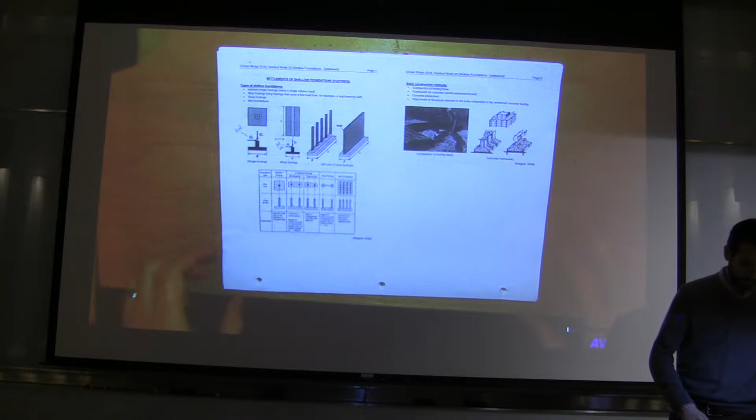Because I didn't know how to say it in English. Thank you. It was, all right.

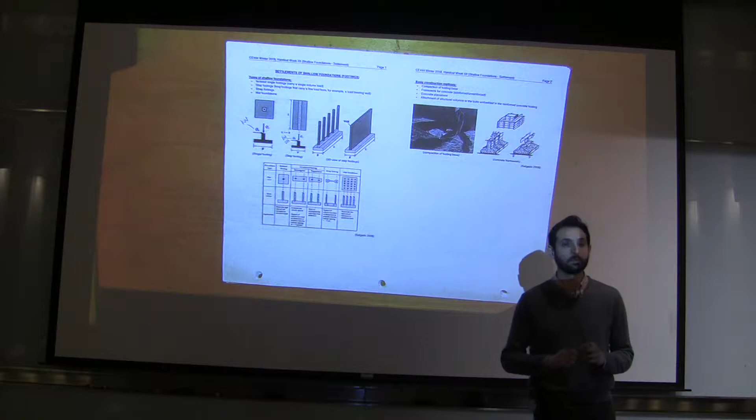Just a general question from the homework: are we going to... there's a portion of it that seems like review material, and the second question where you're breaking it up into sub-layers to calculate the effective stress and consolidation of those layers. Are we going to be reviewing that as a class, or is that something we need to review on our own? I expect that you reviewed that on your own.

That part is related to the consolidation class in soil mechanics, and I'll get to that in today's class, and I'll show you the part that I want you to review. You can use the homework assignment I uploaded on D2L under soil mechanics notes as a guide to help you go through that part of homework 3. But I rely on you to review that part.

From last class, I was getting a little confused. For flexible footing, is it when the stiffness of the footing is less than the stiffness of the soil? That's a good question, there isn't a really good answer to that of what less is. It's not when the stiffness is less than the soil stiffness.

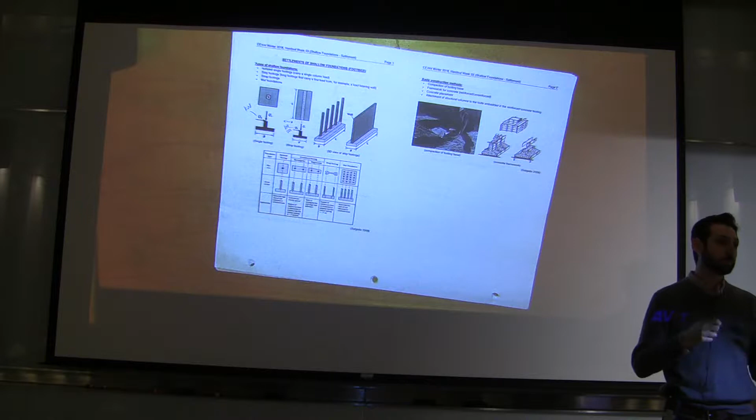The stiffness of the footing, the foundation, whatever material it is, whether concrete, steel, or wood—foundations are usually concrete, but in some cases might be made from other material. Whatever it is, it's going to have a higher stiffness compared to the soil. The question is how high that stiffness is compared to the soil. If it's really high, then it acts as a rigid foundation, but if it's somewhere closer to the stiffness of the soil or rock, then it's considered flexible.

For example, if you're building a foundation on sands and clays which are relatively softer, that concrete foundation will act as a rigid foundation. But if you're building the same concrete foundation on top of rock, which we do a lot when we build bridge foundations—we want to get down to the bedrock, not put the foundation on the soil, but dig and excavate enough to get to the bedrock.

In those cases, the stiffness of concrete compared to the stiffness of rock are pretty comparable, and in that case the foundation acts as a flexible foundation. So it's really a relative ratio of these stiffnesses.

And there's no set number, we can't really say—relative is kind of vague. There's no distinct line you can put there where this is everything above. I think there are some numbers based on older closed form solutions.

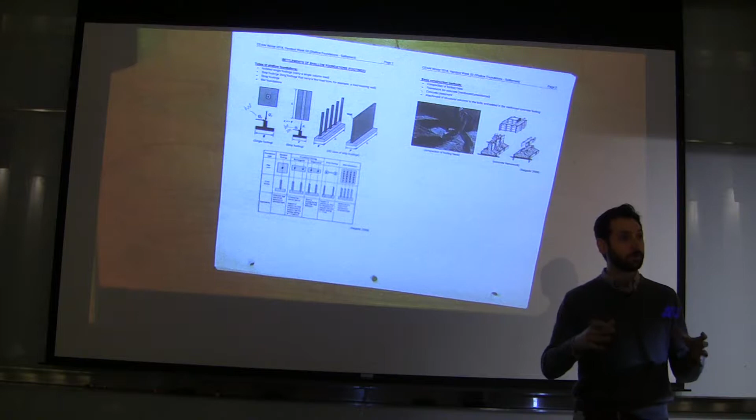So just one example for that, and we do that quite often: I was working on a bridge project in Canada where we had to design the foundation. There were two types of foundations: deep foundations, piles that were going to be drilled into rock, and then footings, giant 4 by 5 meter with almost half a meter to 1 meter thickness footings sitting on bedrock.

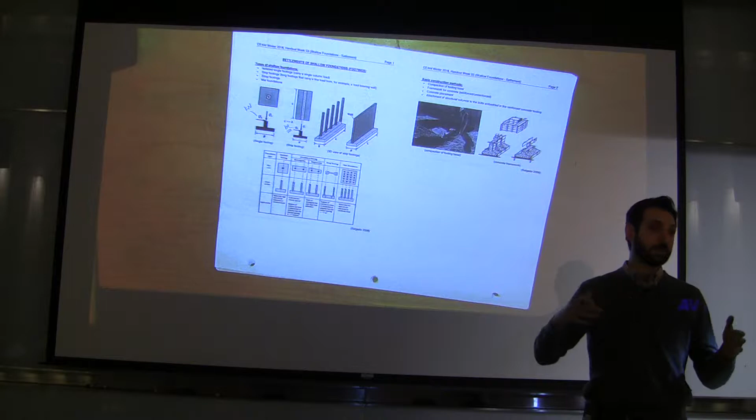We originally started assuming rigid foundations, and then the client, the structural engineers, came back and said, well, you're making this assumption, it's conservative, but in the seismic studies, it may not necessarily be conservative. And you can easily switch back and do the calculation based on flexible foundation.

In our case, it turned out that for a 4 by 5 meter with 1 meter thickness concrete footing sitting on the type of rock that we had on the eastern side of Canada, which rock tends to get a lot stiffer as you go towards the east versus the west, that foundation turned out to be flexible because the rock was so stiff.

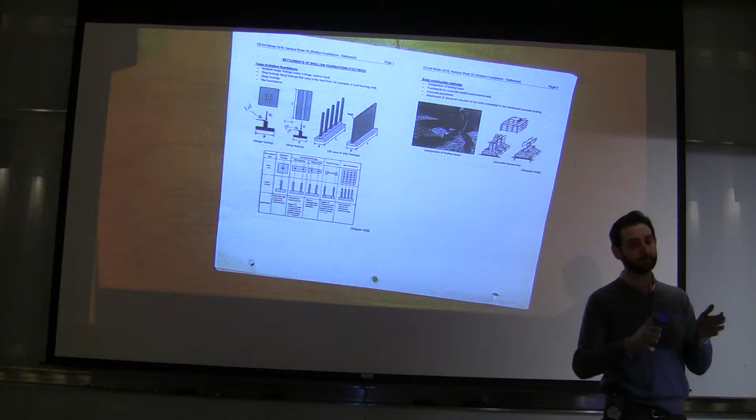So to give you a short answer, there are limits, but I don't have it off the top of my head, and we tend to not really use them these days.

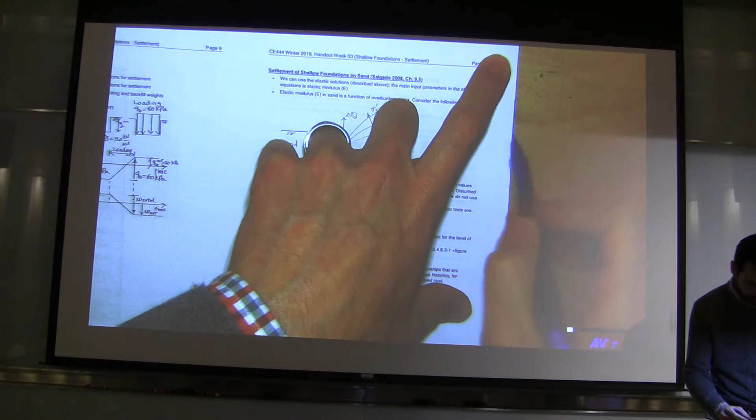All right, so page 10, settlement of shallow foundations on sands. I'm just going to quickly go over the remaining pages to give you an idea of the outline of the class. So we have the settlements on foundations on sand, and that goes through pages 11, 12, 13, 14.

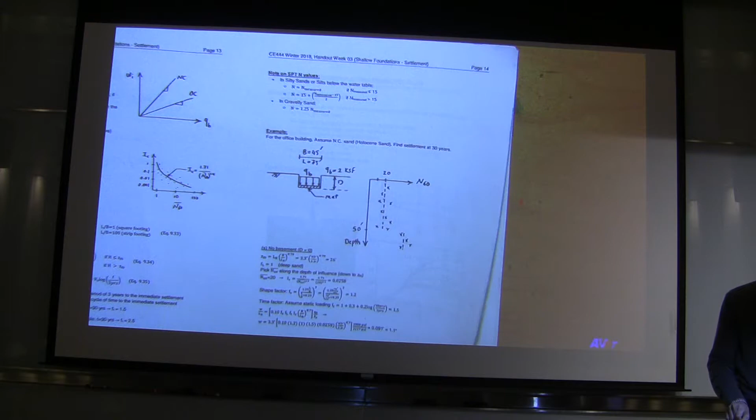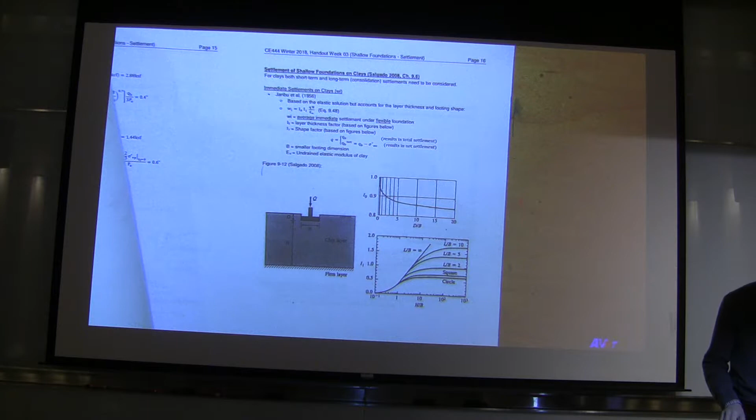And then on page 16, we get the settlement of shallow foundations on clay. The settlements in clays are divided into 2 sections, the immediate settlements and the consolidation settlements. The material on pages 16, 17, 18, and 19 are for the immediate settlement of foundations on clay.

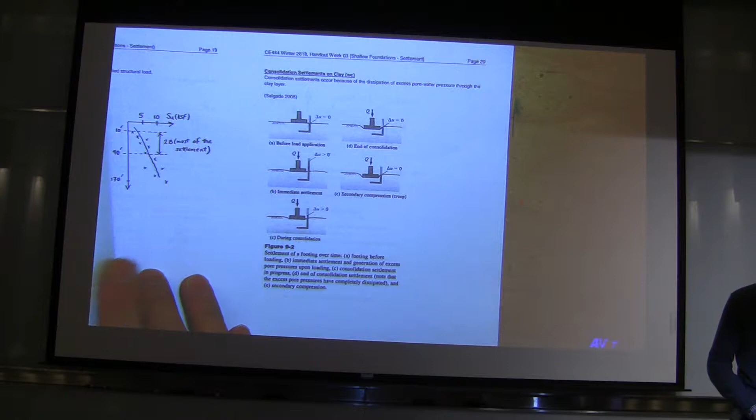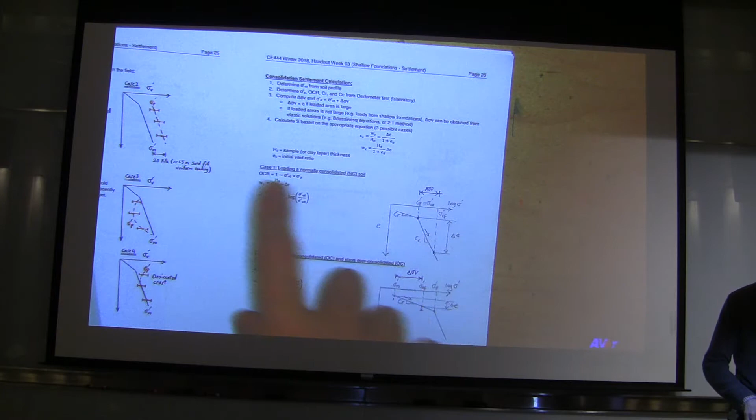And then starting page 20 is the part that I want you to review on your own, which is the consolidation settlement. That goes through pages 20, 21, 22, 23, 24, 25, 26. So if you remember on 26, we had all these case 1, case 2, and then on page 27, we have case 3 in our soil mechanics class.

These are basically reviewed, so I'll ask you to review this on your own.

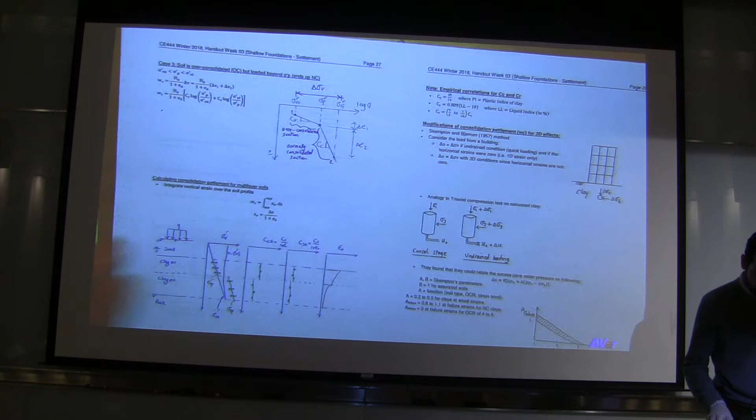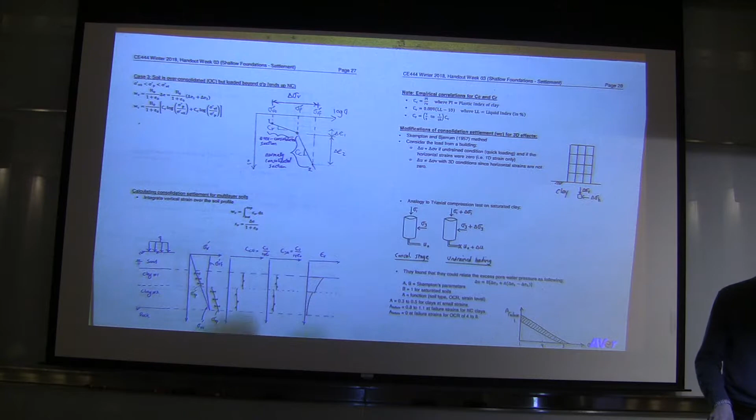On page 28, there is a section I'll start covering in this class, the modifications we have to do for 3-dimensional settlements. The stuff we discussed in soil mechanics are all 1-dimensional settlements. Now we want to see what happens underneath a building where we get a 3-dimensional settlement and dissipation of the pore water pressure, and how that affects the amount of settlement. So there's a little piece on pages 28 and 29 on 3-dimensional settlement that I'll cover as part of this course.

So let's go back to page 10. It's on the settlement of foundations on sand.

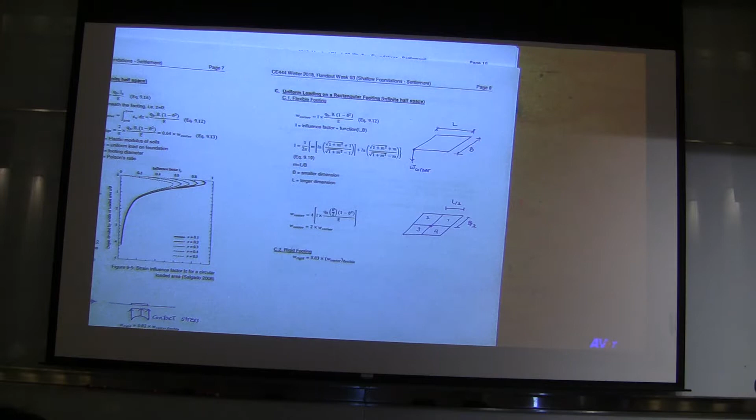Now I want you to, for a second, go back to the equation that we had for elastic solution. Maybe flip back through your notes and let me know if you can spot the general equation for elastic solutions. Let me know the page number. Oh, here it is, page 6.

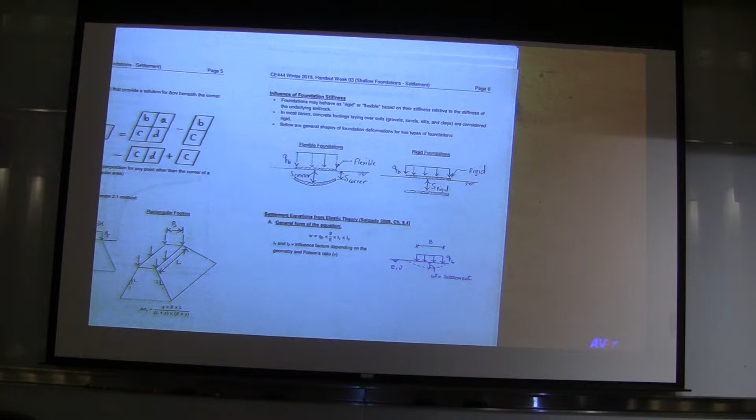General form of equation based on elastic solution. So when we say elastic solution, it means that we don't care about sand or clay or any other material. It could be steel, concrete, anything. That's how the form of equation is developed. I want you to look at the components in this equation.

So the settlement is a function of QB, that's our load. If you increase the load, the settlement increases, that's obvious. Then we have B, the dimension of the footing, in the numerator. That's a little counterintuitive, because you'd think that if I'm increasing the dimension of the footing, why would my settlement increase? Well, the reason is that if you increase the dimension of the footing and keep QB, the stress, the same, your total load will increase with the square of the dimension. So you're increasing the dimension, but your total load is increasing more than your dimension is increasing, and that results in the increase in settlement.

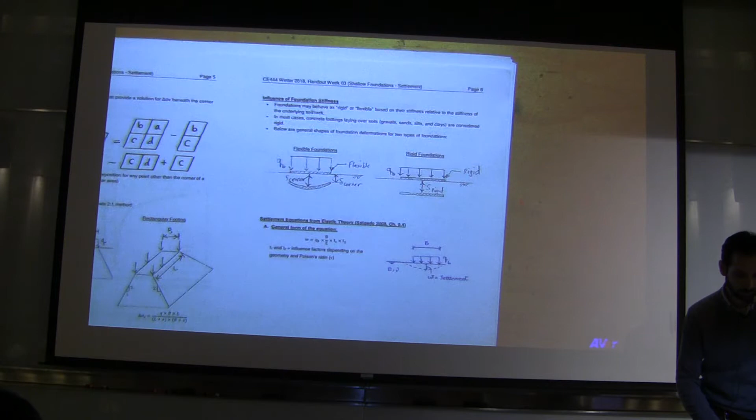Is that kind of clear? Yeah. That B being in the numerator is something that usually confuses people. And then there is elastic modulus in the denominator. So if the elastic modulus increases, the foundation settlement decreases. Let me first ask the question, what elastic modulus does this refer to? Is it the soil or the foundation? Soil. It's the soil. It's the elastic modulus of the soil.

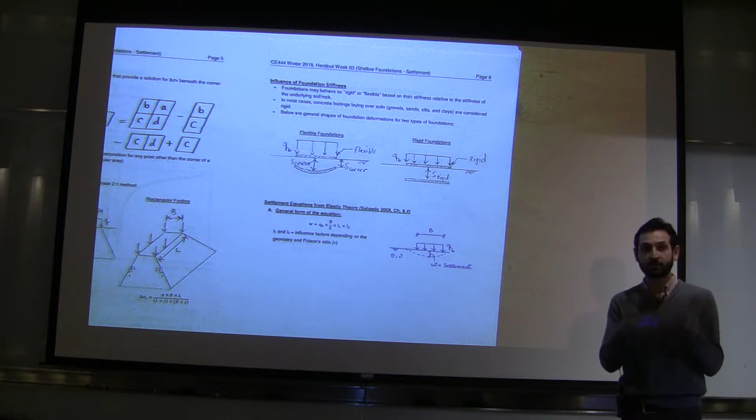Let me make a small note on that. There is really nothing here on the stiffness of the foundation, except the fact that when we get to the flexible and rigid footings and the settlement at the center and corners, that's where the stiffness of foundation comes into play. But in terms of the settlements in general, that's just the elastic modulus of the soil.

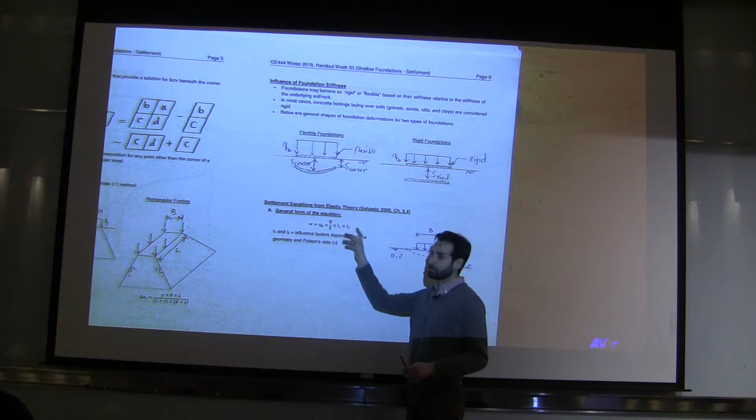And then there are those two other factors, I1 and I2, and depending on whether you're using the sand equations or clay equations, whether it's a circular footing or the rectangular footing that I've discussed on the following 2 pages, these influence factors may be named something else. So they may be called I1 and I2, as you see in this general equation, or they may be called, let's see, if you flip to the next page.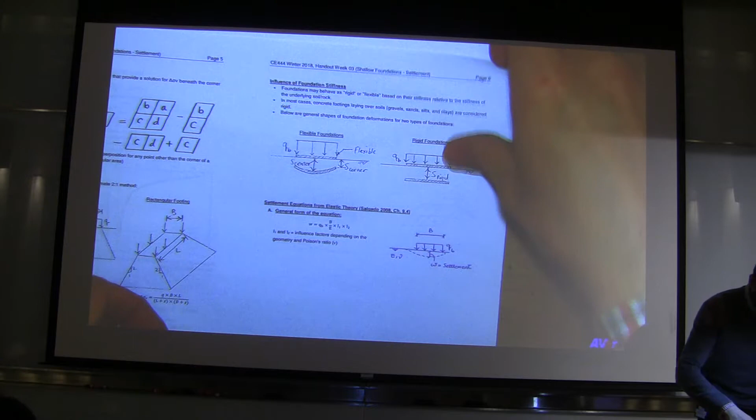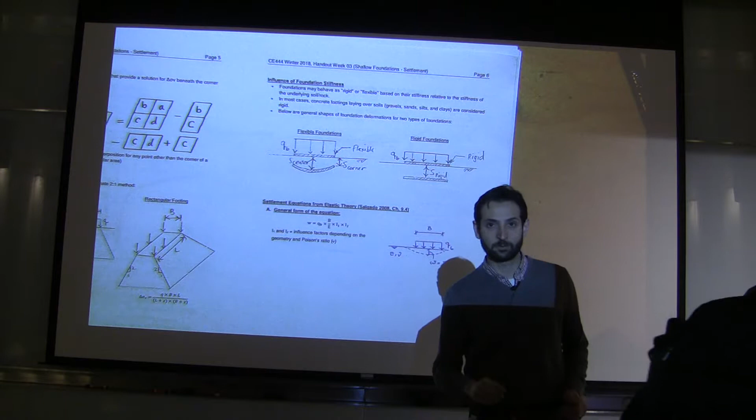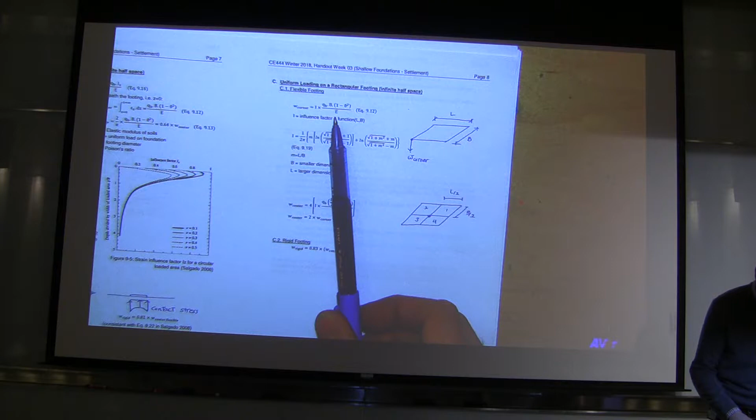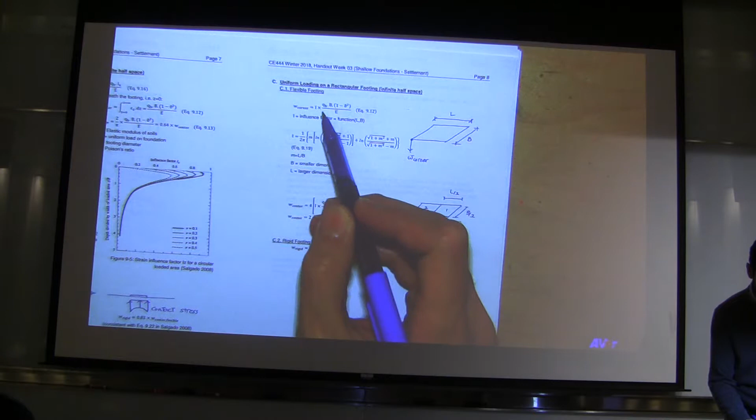So if you flip to page 7, you see there is an I sub z. So instead of I1 or I2, it's just I sub z. If you look at page 8 for the settlements for a rectangular footing, you see the same components. There's a QB, there's a B in the denominator, there's an elastic modulus in the denominator, and then there's an I factor there, and 1 minus nu squared, nu being Poisson's ratio. So those variables are always there, QB, B, elastic modulus, and the rest of them are these modifiers that depend on the shape of the footing, depend on the depth of the bedrock, depend on the Poisson's ratio of your soil. So all these other factors are lumped into these other influence factors, or I factors.

Now I'm going to go back to page 6 and look at that general equation. So the load, foundation dimension, elastic modulus, and some other factors. Now, your load is given. The structural engineer gives you the load. The foundation dimension is also set. You're trying to design a foundation. You make an assumption on the foundation dimension. You say, I want to check to see if the foundation with the size of 2 feet by 4 feet is going to work.

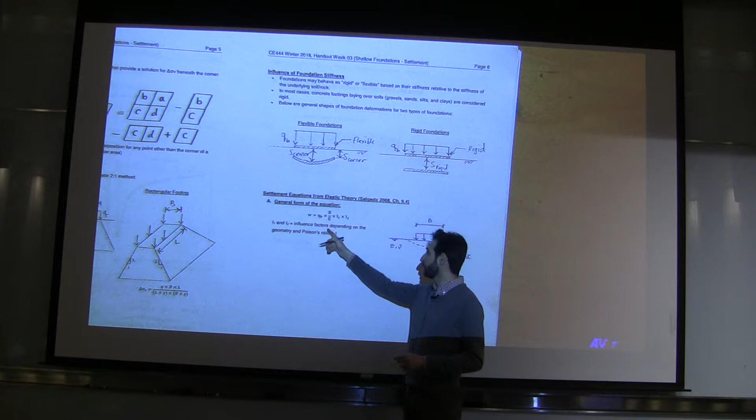So that is set. The influence factors are important, but not that important. But there is one factor that is very important, and that's the elastic modulus of the soil. It turns out to be something that is very difficult to measure or estimate. If you measure your elastic modulus to be 2 times higher or 2 times lower, your settlement will be directly influenced by that estimate. This is the elastic modulus of the soil or rock underneath your foundation.

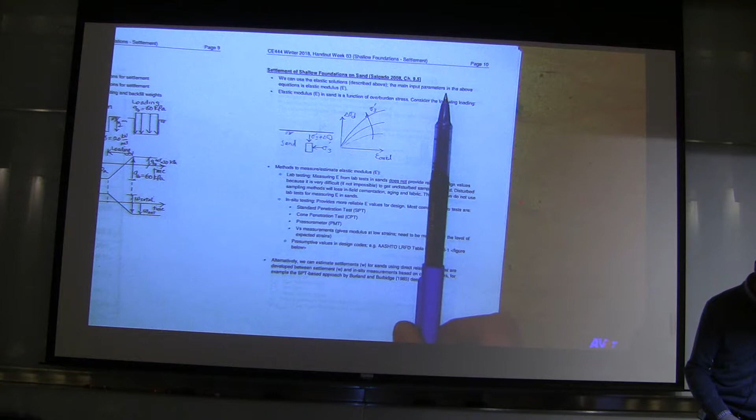Knowing the importance of that, now I'm going back to page 10 to read the first bullet item. We can use the elastic solutions described above, on page 6. The main input parameter in that equation is the elastic modulus. So what we need to do, if you have a foundation sitting on sand, is estimate the elastic modulus of that sand. It turns out to be easy to say, but very difficult to do.

Part of the reason is that sands are cohesionless - are they cohesive or cohesionless? Cohesionless. They're granular, cohesionless soils, right? Granular, cohesionless soils are stress dependent or stress independent.

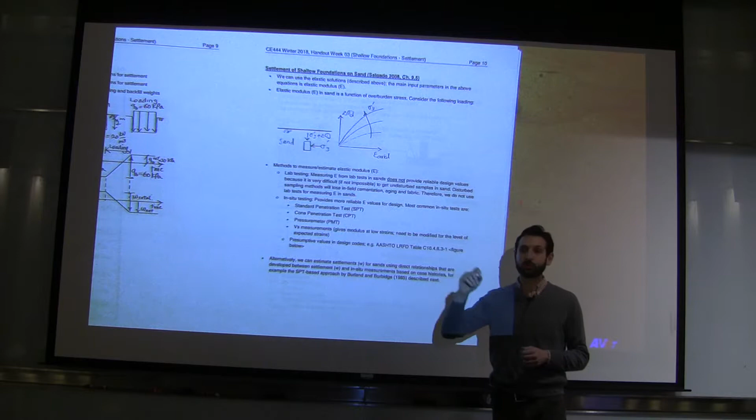Before you answer, let me step back and go back to week 1. We started with soil strength, right? We said the strength of the soil is equal to C plus tan of phi times normal stress, sigma. For clays, the phi angle was 0, so the strength is just a solid line. I'm going to draw it here. This is the strength of soil, and this is sigma, or sigma prime.

We said the general form of the strength - this is failure on a failure plane - is C prime, this is C prime, and this is the angle phi prime. So that's C prime plus sigma prime multiplied by tan of phi prime. Now in sands, C prime is 0, so your behavior is only governed by phi prime, the friction angle, which means if your sigma prime increases, your soil strength also increases.

That basically means that sands are stress dependent. So if you're looking at a sand underneath 1 meter of soil, at depth 1 meter, it behaves differently than a sand that is under 10 meters of soil, because sigma prime at that depth is different.

For clays, it's otherwise. We usually write it in the form tau ff equals just Cu, and this whole term disappears. So it just becomes a constant that is not related to sigma prime. If you increase your stress, the shear strength of that soil is not going to change, and if you reduce it, that shear strength is also not going to change. That is why we call sands stress dependent, and clays we call them stress independent.

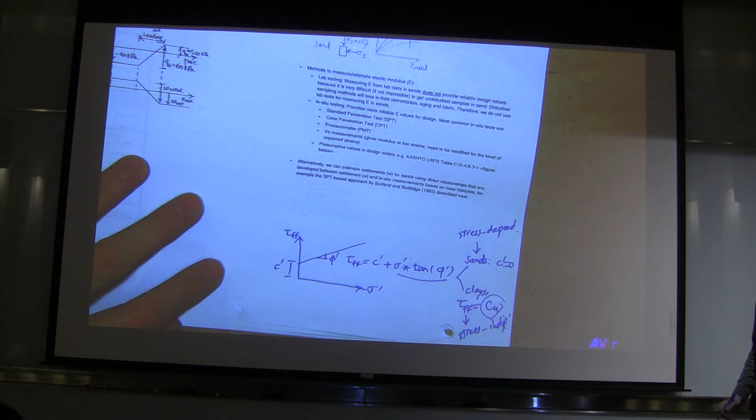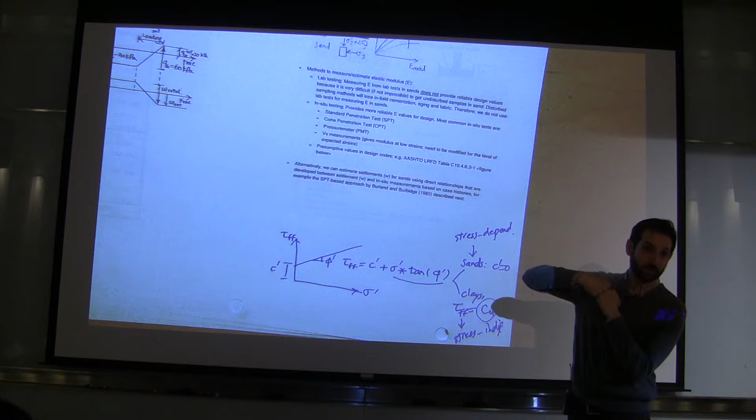So the stress dependency of sands is basically related to the fact that they're granular soil. If you have 2 grains - my knuckles are soil grains - the more you press them against each other, it increases the interlocking between soil grains, and that increases the strength.

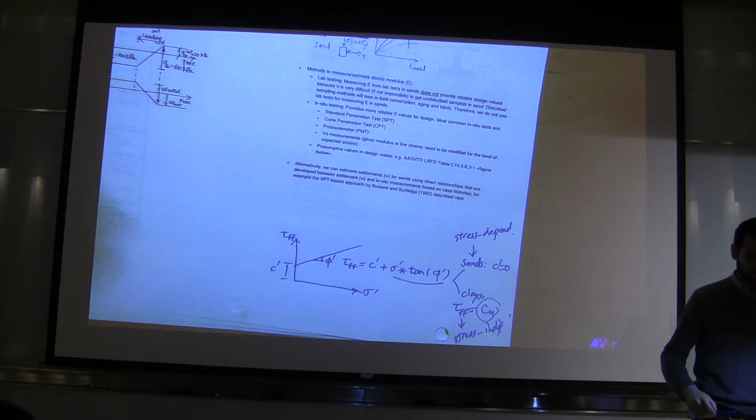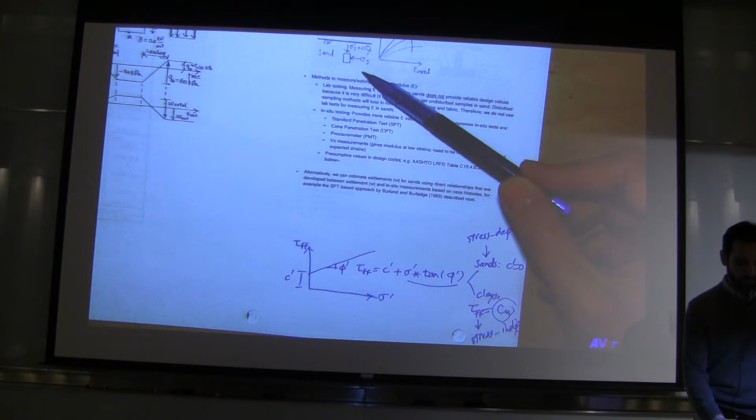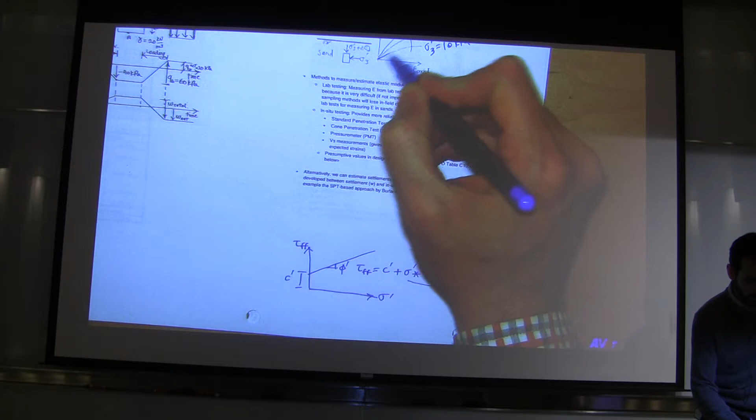The other parameter that changes as you increase the stress is the elastic modulus. Going back to this drawing here - that's ground surface, you have a sand specimen, you bring it to a lab, you do a triaxial test, applying a confining stress of sigma prime 3 all around, vertical and horizontal, and then on top of that you apply a deviatoric stress of delta sigma d, and you plot delta sigma d versus axial strain. It turns out that the behavior changes as your sigma prime 3 increases. So if you're testing a sand under sigma prime 3 of 10 kPa, it will have a certain elastic modulus. And if you test the sand under a different sigma prime 3, give me a number...

At 30 kPa, the elastic modulus, which is the stiffness of this line, increases.

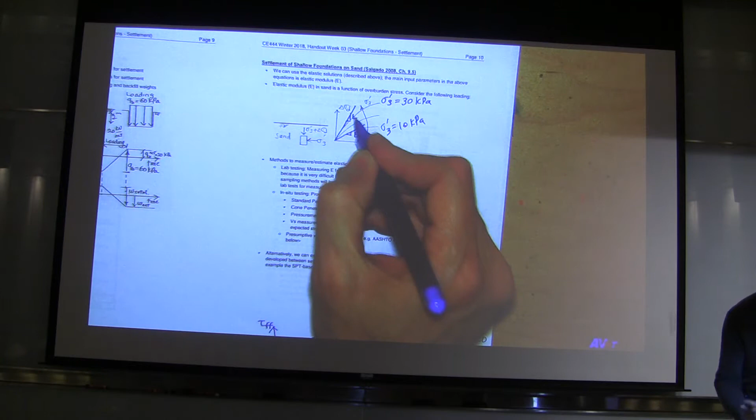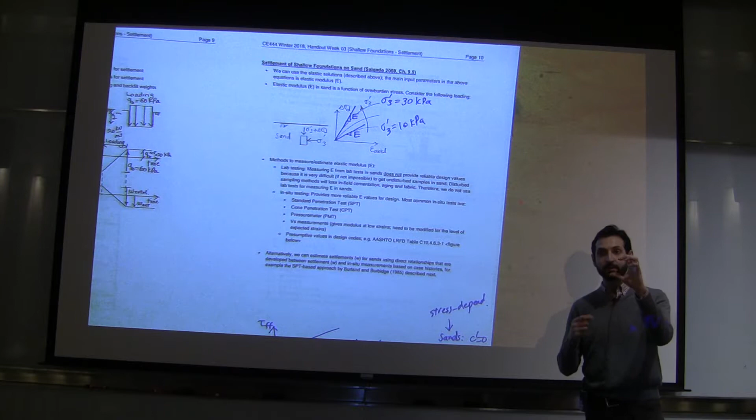Going back to the settlement calculation, we want to know what that E in the denominator of that equation is. That was the goal. But it's complicated because as you go deeper into the soil, the elastic stiffness of your soil increases. As you get shallower, the elastic stiffness decreases.

That basically describes why it's complicated to measure. But how do we measure it? How do we go about this complexity? There are different methods to measure or estimate elastic modulus. The options are lab testing, in-situ testing, and presumptive values.

Let's look at lab testing first. Lab testing is when you take the soil, bring it to the lab, and test it. Turns out it's not a very good way of calculating or measuring the elastic modulus of soil, partly because sands are cohesionless. So when you sample them, you lose the in-situ characteristics of the soil, including cementation, aging, and fabric.

That's not the case with clays. Clays are cohesive, so when you sample them and bring them to the lab, they keep their characteristics because they keep all the particles and the fabric together. But sands break apart, so once you bring it to the lab, it's a totally different soil than what it really was in the ground.

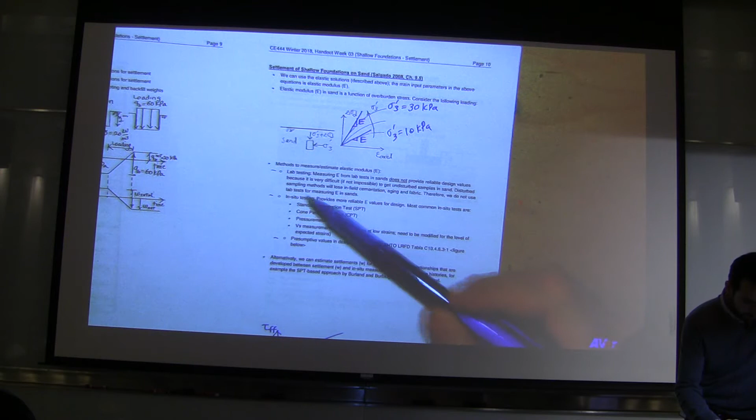So that's about lab tests. Therefore, we do not use lab tests for measuring E in sand. The next way of measuring or estimating elastic modulus in sand is in-situ testing. If we're dealing with this limitation that we cannot sample, what about measuring it in the soil, keeping the soil there, lowering the device into the ground and testing it there? That's what we call an in-situ test. The two main in-situ tests we discussed in this class are SPT and CPT, standard penetration test and cone penetration test.

There is also PMT, or pressure meter test. There is also VS measurement. VS is shear wave velocity. So...

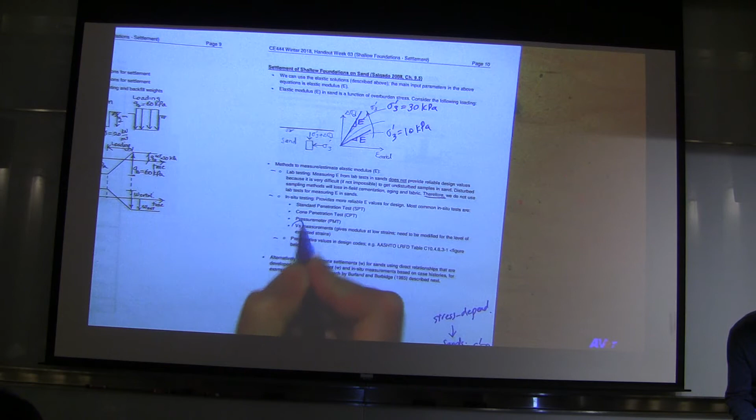Shear wave velocity - we don't really get into the details of how we measure it in the field, but it's basically by sending a very small mechanical wave and measuring how much time it takes for the wave to go from point A to point B.

That gives you the shear wave velocity of the soil. Turns out that we can use shear wave velocity to estimate the elastic modulus of the soil. Again, we leave that aside for other classes.

So what if you don't have budget to do any of these? Or what if you're in phase 1 or phase 0 of your project and you want to get a rough estimate of your foundation settlement?

Then presumptive values come very handy. In fact, we use presumptive values in codes a lot. Even when you're in the final stages of design, we tend to use them as a sanity check. So even if you do a lab test or in-situ test, we compare those results to presumptive values in codes to make sure we're in the correct ballpark of numbers.

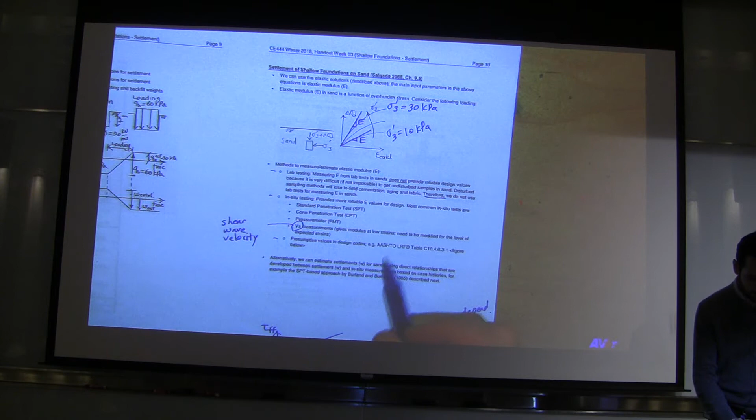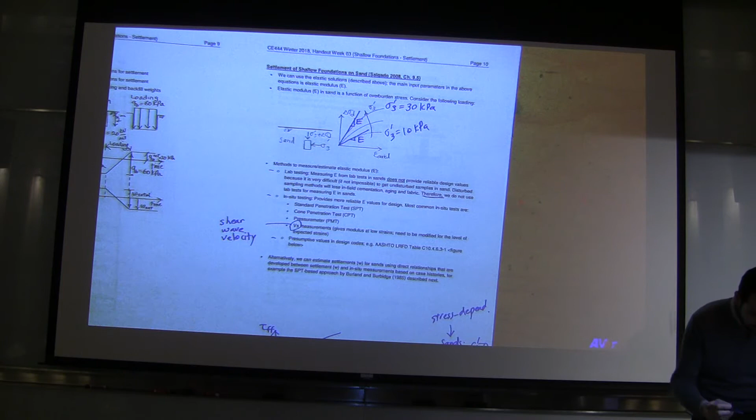One of those examples is from the AASHTO LRFD table C10.4.6.3-1, which is the figure on the next page. I'll talk about that in a second. But yeah, let's talk about that, and I'll go back to that last bullet item.

So let's flip to page 11. This is that table in AASHTO. AASHTO is a code that we use for bridge design. So you have the type of soil on the left column.

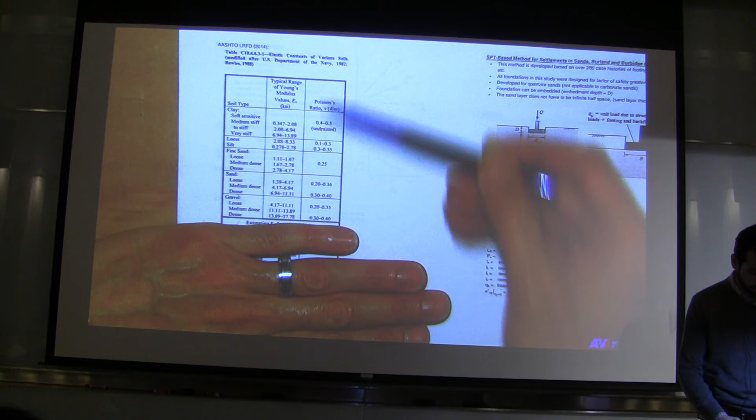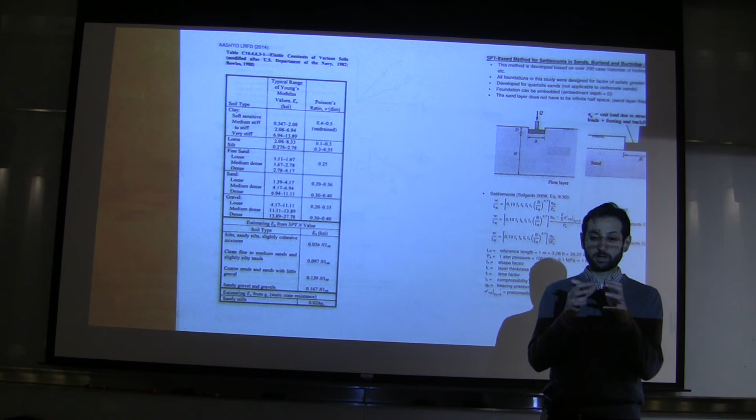Let's focus on the top portion of this table. So then you have the elastic modulus, and then you have the Poisson's ratio. For clays, Poisson ratio ranges between 0.4 to 0.5. It's usually undrained behavior for clays, which means the water cannot leave or seep into the sample.

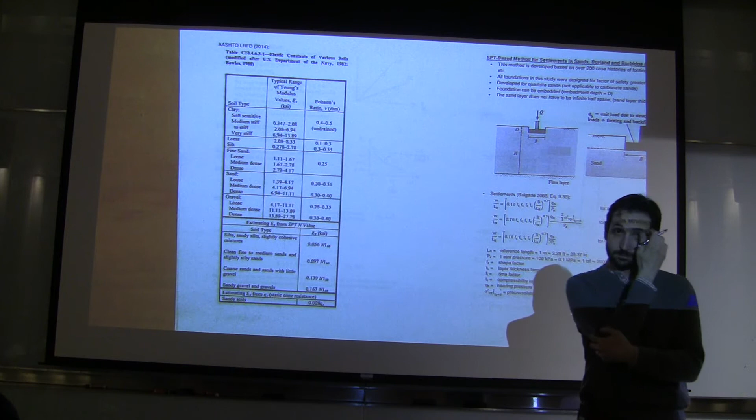And what is the Poisson's ratio of water from your solid mechanics class? What is the range of Poisson's ratio? 0.5 is the maximum Poisson's ratio we can have, and it's an incompressible material.

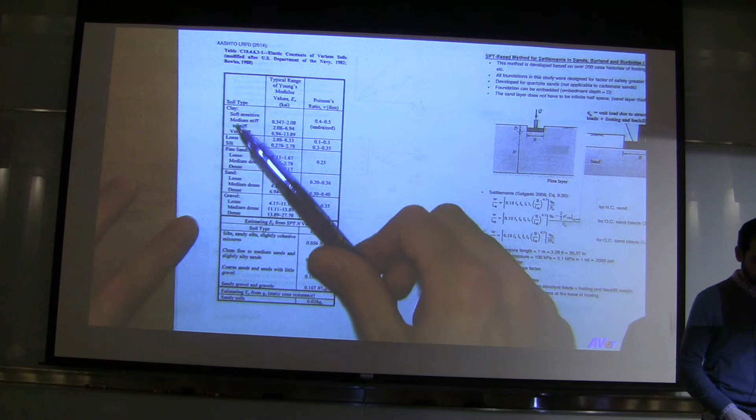So for engineering loads, water is considered incompressible. So the Poisson's ratio of water becomes 0.5, and that is why for clays that behave undrained, their Poisson ratio is pretty close to 0.5, because the water cannot exit or enter the sample.

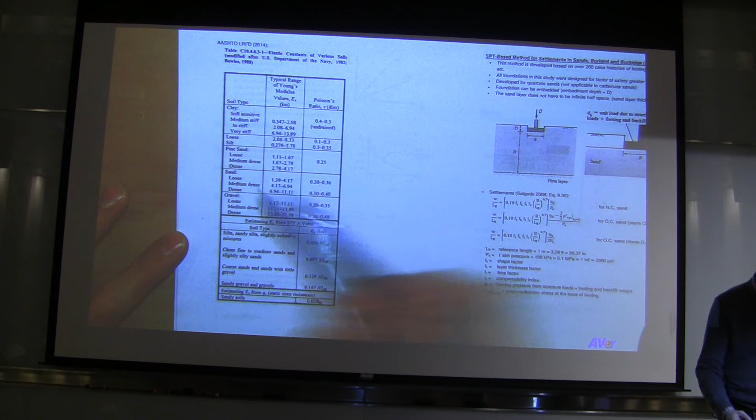And then you can look at the other soils. So if I pick sand here for loose sand, medium dense, and dense, that's the range of Poisson's ratio that we use. It's very typical to use 0.35 for sands if you don't have any other number.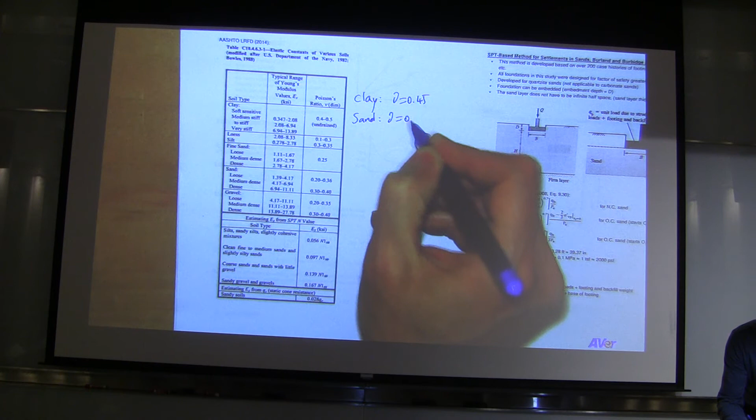So I'll give you these two values: for clays, Poisson ratio of 0.45, and for sands, Poisson ratio of 0.35. It's fairly typical to use these.

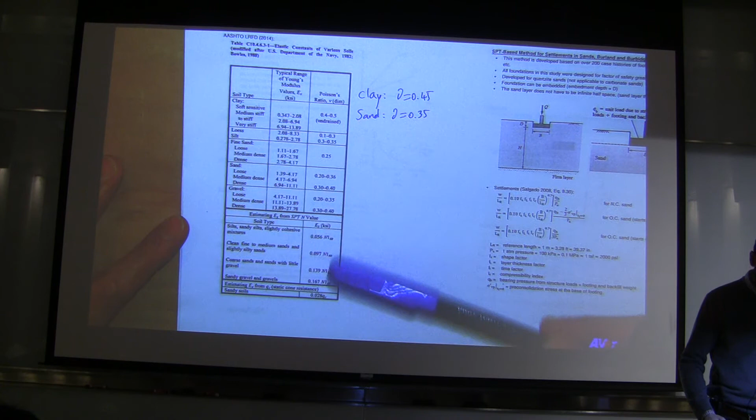In the lower part of this table, there are some equations to calculate or estimate elastic modulus using in-situ measurements. These use N160, and if you do a cone penetration test, you can use QC here.

One comment about QC and QT - I got some questions about corrected versus uncorrected tip resistance, and I want to clarify this. In all these equations, whether it says QC or QT, assume that is a corrected tip resistance.

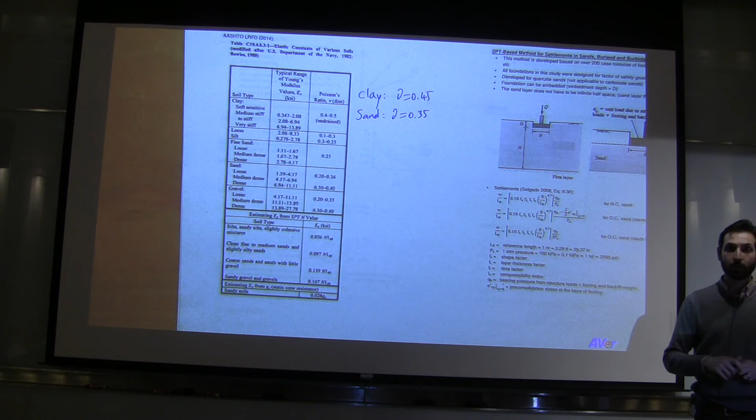So this equation here, or the older correlations that we had in week 2, always assume that the QC or QT in that correlation is a corrected tip resistance, which becomes important in clays, but not that important in sand. Corrected tip resistance.

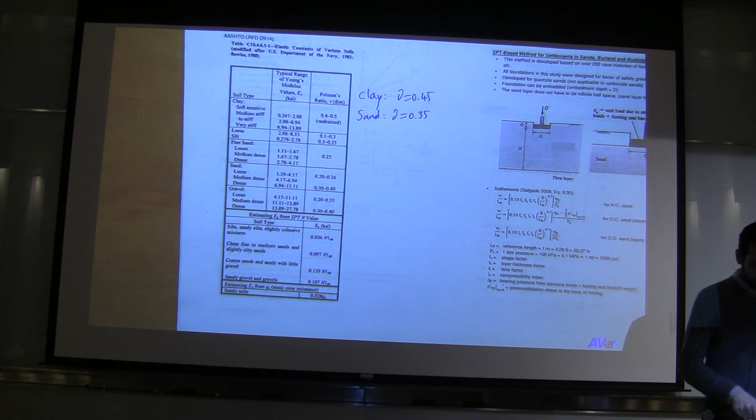All right, so that's a table for presumptive values for elastic modulus. You can kind of see the range of values in KSI. For clays, it's 0.3 to 2, or goes up to 15. For sands, it looks a little higher, and that's reasonable, since clays are usually softer material compared to granular material.

So I want to go back to that last bullet item on page 10.

One way to calculate settlement in sand is to use that general elastic equation. The load is given, so QB is given, the dimension is given, and you can come up with those I1 and I2 factors. Let's leave that aside. But if you are able to estimate elastic modulus, then you can calculate it yourself. That's one way to do it.

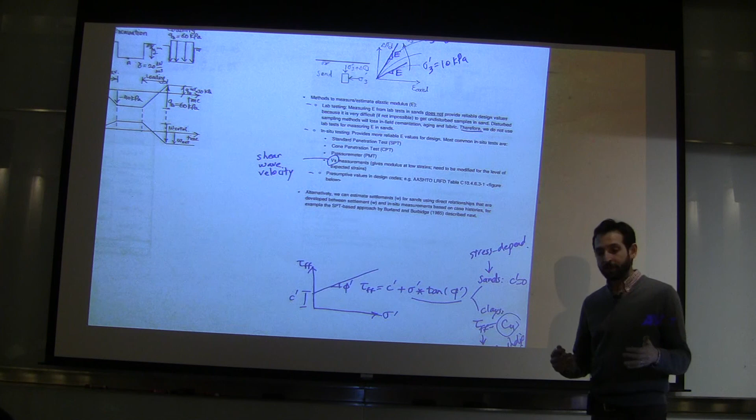The second way to do it is that, well, if I'm going to use in-situ tests and in-situ correlations to come up with elastic modulus, can I write my settlement equation to be directly related to the...